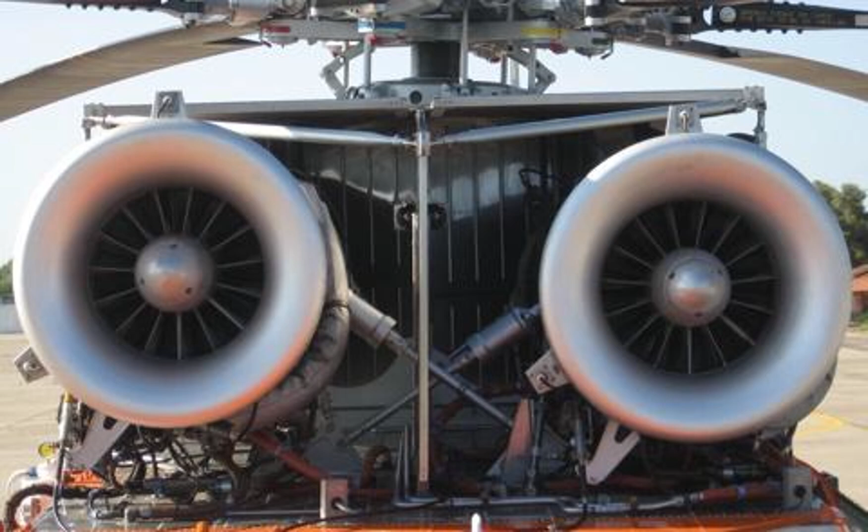Main engines. General description. The S-64 Echo has two main engines rated at 4,500 shaft horsepower mounted on top of the fuselage forward of the main transmission.

The engines are Pratt & Whitney model JFTD 12 Alpha 4 Alpha, which translates as JFTD Jet Free Turbine Drive, 12 Alpha compressor type gas generator straight through design, 4 Alpha major modifications to complete the engine.

Engine symbols and stations. Engine symbols. N1: gas producer, compressor and N1 turbine. Speed given in percent. At 100%, the N1 RPM is 16,030 RPM. N2: free turbine speed given in percent. At 100%, the free turbine speed is 9,000 RPM.

Papa is for pressure. Tango is for temperature. A number following Papa or Tango indicates the engine section, i.e. T5 is the temperature at engine station number 5. Engine stations.

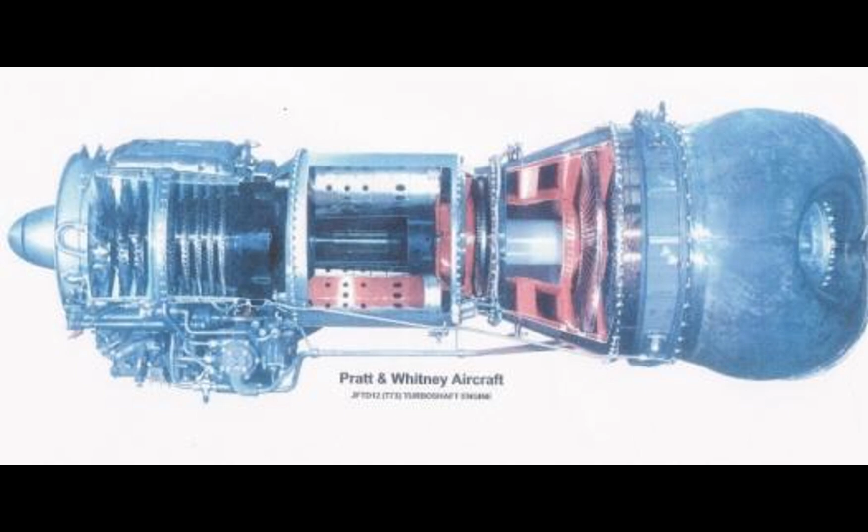Station number 1, air inlet at bell mouth. Station number 2, inlet guide vanes. Station number 3, compressor discharge diffuser. Station number 4, gas turbine inlet. Station number 5, free N2 turbine inlet. Station number 6, free N2 turbine discharge. Station number 7, exhaust outlet.

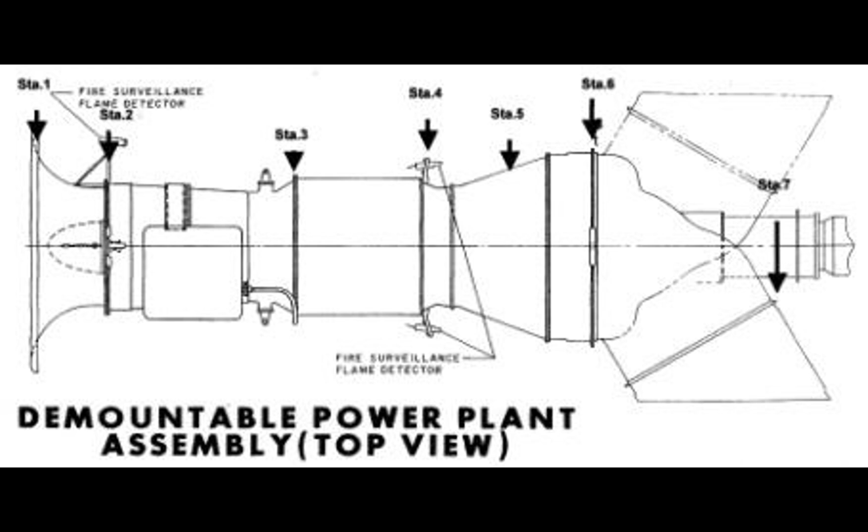Engine sections. Inlet section, engine bell mouth. The bell mouth shaped air inlet is bolted to the compressor inlet case. The bell mouth shape is designed to maximize ram recovery at low speeds.

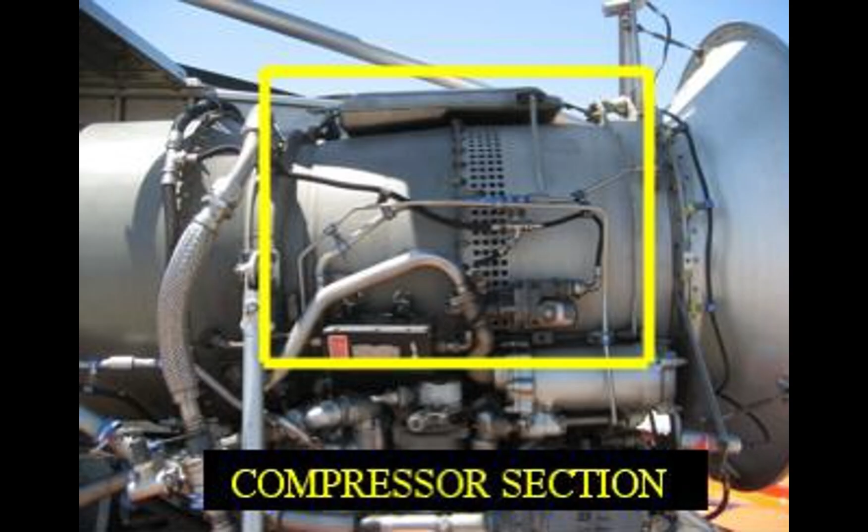Compressor section. Compresses air for engine operation, also provides a mounting for the number 1 main bearing, roller type. The compressor is an axial flow compressor consisting of 9 rotors and 8 stators. The compressor delivers air to the combustion section at a 6.5 to 1 ratio.

Immediately downstream of the 4th rotor stage, compressor air is bled off by an automatically actuated bleed band to facilitate engine starting and increase engine stall margin at low N1 operation. The gas generator turbine drives the compressor.

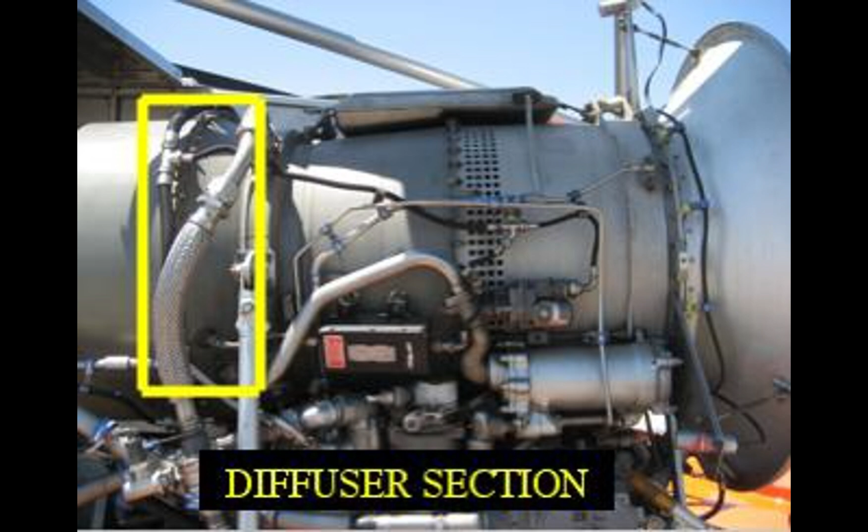Diffuser section directs airflow through the engine. Also provides mounting for the number 2 bearing, ball type, and the forward engine mounts. The diffuser section located between the compressor and the combustion chamber reduces the velocity and increases the pressure of air into the combustion section. High pressure air is bled from this section for internal and external air bleed systems.

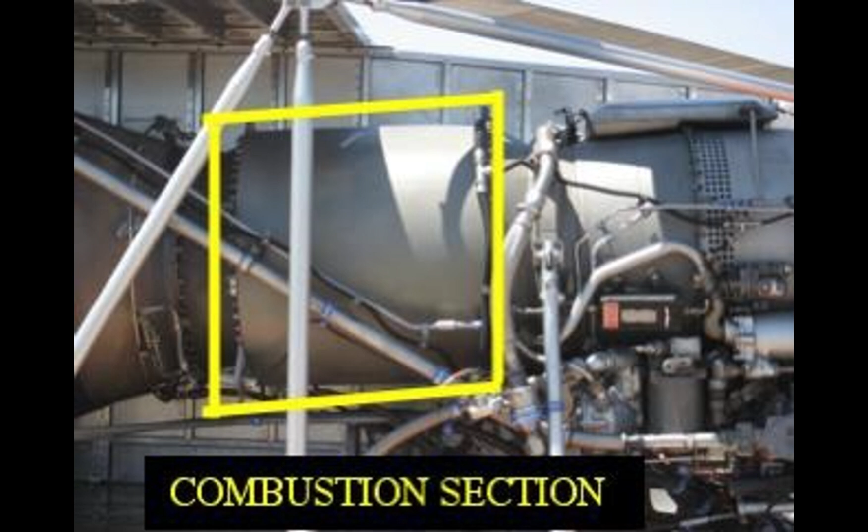Combustion section mixes air and fuel for combustion and directs exhaust gases toward the turbine section. Also provides mounting for the number 3 main bearing, roller type. The combustion section is a can-annular burner type, which houses 8 burner cans in an outer case. Fuel is delivered to each burner through a dual orifice nozzle.

Burners 3 and 6 are equipped with spark igniters to start combustion. All burners are interconnected with crossover tubes to permit flame propagation during start cycle. At the aft of the combustion section and secured to the combustion chamber inner case is the combustion chamber outlet duct. The outlet duct slightly reduces velocity and straightens the airflow exiting the combustion chambers to reduce drag.

A fuel drain incorporated at the bottom of the combustion chamber case automatically drains the combustion section after engine shutdown. The fuel is drained into a holding tank at the lower right of the rear of the cockpit section.

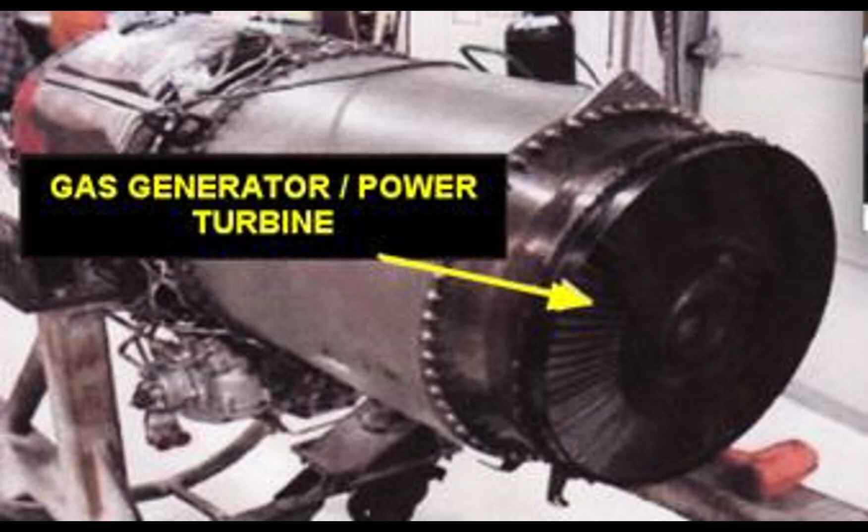Turbine section. Gas generator or power turbine, a 2-stage turbine wheel connected by drive shaft to the compressor and to the component drive gearbox. The turbine discs are attached to the turbine shaft hub with bolts and are separated from each other by the turbine rotor inner seal.

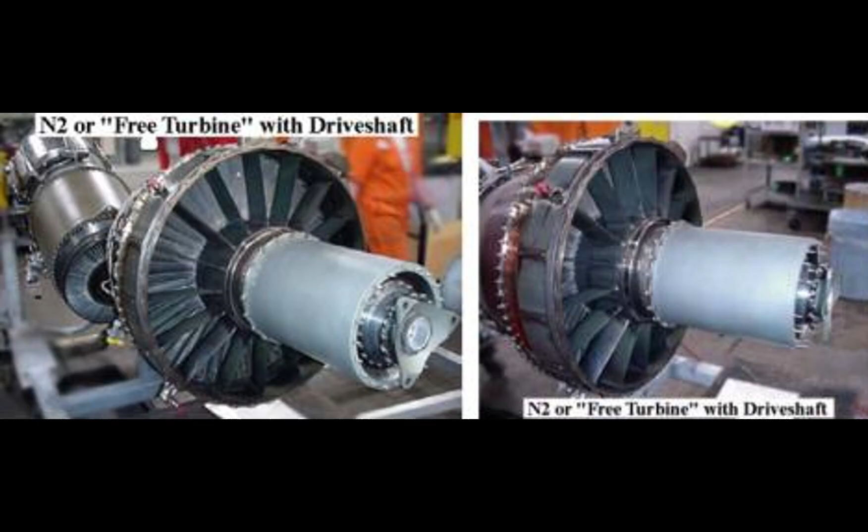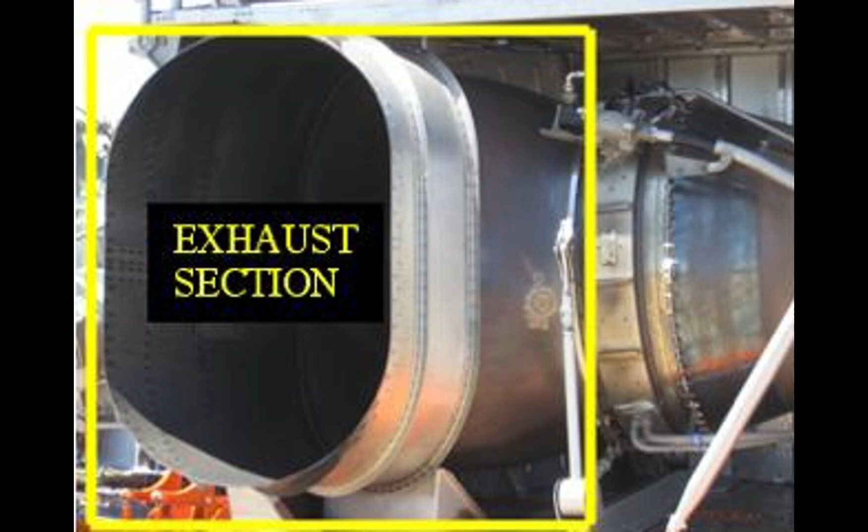N2 turbine or free turbine, a 2-stage turbine wheel connected by drive shaft to the input quills of the main transmission. It also provides a mounting for the number 4 and number 5 main bearings. The exhaust section contains the N2 accessory drive shaft to the N2 accessory gearbox. The gearbox drives the N2 flex shaft cable and the N2 tach generator. Exhaust section ducts the exhaust away from the aircraft.

Component drive gearbox, sometimes called the N1 accessory gearbox, contains the following: the main component drive tower shaft from the N1 shaft, engine starter, N1 tachometer generator, fuel pump, fuel control/governor, engine oil pump on number 1 engine, second stage hydraulic pump on number 2 engine, not used.

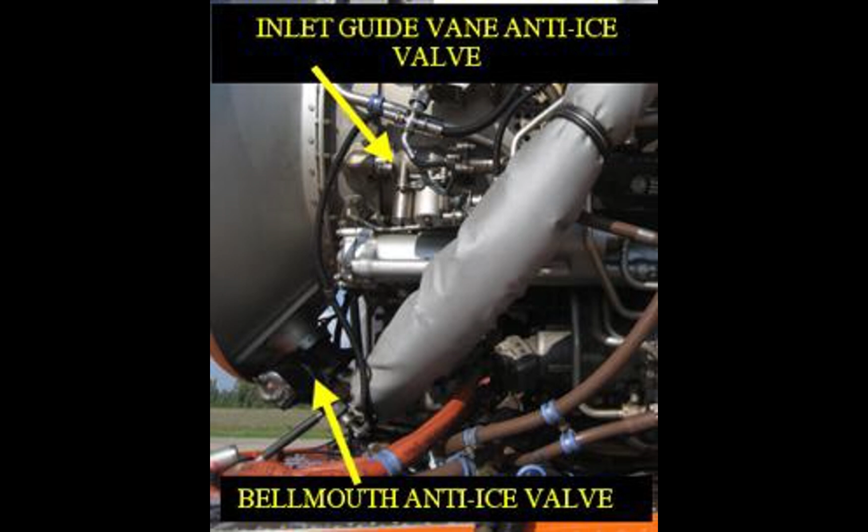Engine systems. Engine air bleed systems. The engine has 3 separate air bleed systems. External air bleed provides air from the 9th stage of the compressor for bell mouth and inlet guide vane anti-ice, fuel heater, and cabin heat. Internal air bleed from the 9th stage is used to cool the hot section, contain the flame in the burner cans, and pressurize the main bearing carbon seals.

Interstage air bleed via the bleed band counteracts compressor instability, thus preventing compressor stall and surges. It is taken from the 4th stage of the compressor and consists of a bleed strap and linkages. It is operated by the fuel control.

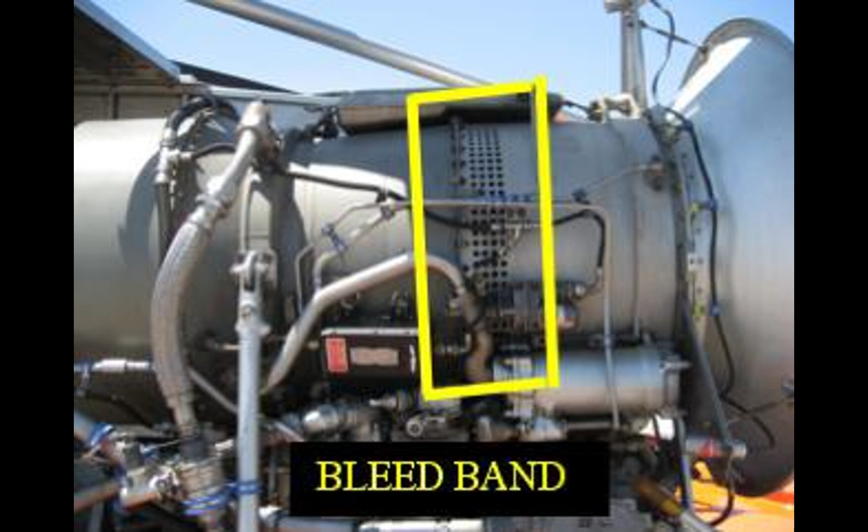Starter system overview. The engine starter motor is located on the lower left of the engine and attached to the accessory drive gearbox. The motor is driven by a 3,500 plus or minus 50 psi hydraulic pressure from the hoist pump. The system is protected by a relief valve set at 3,750 psi and the flow regulator at 15 gallons per

minute. The start cycle. In a typical start cycle, hydraulic fluid moves from the hoist pump through the flow regulator, through the engine start valve, past the pressure switch, through the starter, and then back to the hoist reservoir. The makeup pump supplies hydraulic fluid to the hoist pump to ensure adequate fluid availability to prevent pump cavitation.

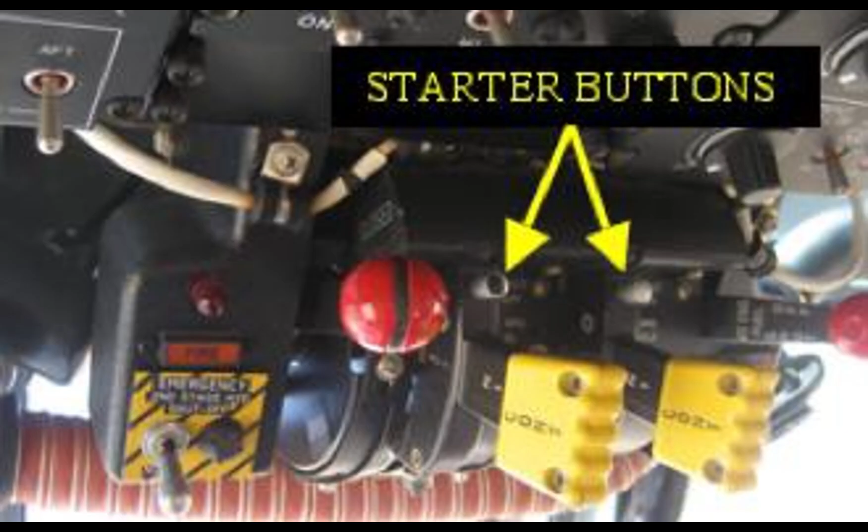Starter circuit. Two starter switches, one for each engine, are located above the N1 levers on the control quadrant in the cockpit. The start circuit is energized by holding an N1 lever in shutoff and depressing the start switch. The start switch energizes the start valve and the starter control relay through the dropout pressure switch.

The start valve allows fluid to flow through the starter. The starter control relay allows the pilot to release the start switch after depressing it for 3 seconds. The start circuit will remain energized until the dropout pressure switch automatically deactivates it, or until the pilot aborts the start. The dropout pressure switch automatically deactivates the starter circuit when the hydraulic pressure in the engine start line drops below 2,000 psi at engine N1 speed of 26 plus or minus 4%.

The abort switch can be activated at any time during the start sequence by pulling out on the N1 lever and moving the N1 lever to shutoff. If the abort switch fails to stop the start sequence, the start may still be aborted by pulling the starter interlock circuit breaker. An advisory light on the caution panel illuminates to advise the pilots when the starter circuit is energized. The starter circuit is 28-volt DC from the number 1 DC primary bus.

The advisory light marked number 1 or number 2 engine start on will go out when the dropout switch deactivates the starter circuit.

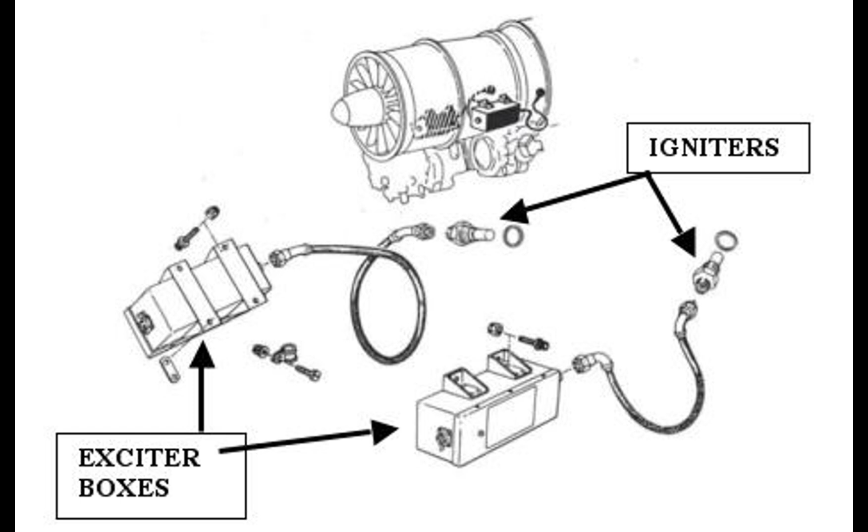Ignition system. There are 2 identical ignition systems on each engine consisting of a high-energy exciter unit, connection leads, and a spark igniter inside the number 3 and number 6 combustion cans. The 2 systems operate independently of each other. The system provides high voltage with 1 to 3 sparks per second from each igniter.

The igniters can be heard in the headset when they are firing. Power is from the 28-volt DC primary bus through the 2 switches marked ignition switch number 1 and number 2 on the master switch panel on the center console.

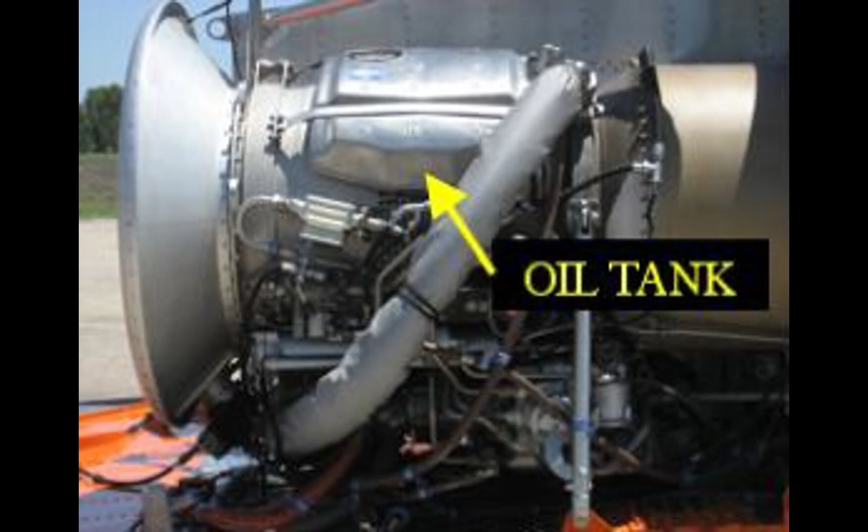Engine oil system overview. Each engine has its own independent oil system consisting of an oil tank, oil pressure system, a scavenge system, a fuel coolant oil cooler, and a breather system. The system is completely automatic, requiring no action by the pilot except monitoring of gauges and caution lights.

Oil gravity feeds from the tank reservoir to the pressure pump. Oil is then forced under pressure through the oil filter and check valve. If the oil filter and check valve become clogged, the oil filter bypass opens. From the filter, oil flows through the fuel coolant oil cooler unless the oil temperature is low. If the temperature is low, a bypass routes oil around the oil cooler.

The oil then flows to the engine main bearings and the N2 speed sense cable and tower shaft. The oil is sprayed on bearings through jets. The oil then gravity feeds to the scavenge pumps, which force the oil up to the oil reservoir. A breather system allows for normal system function with altitude changes.

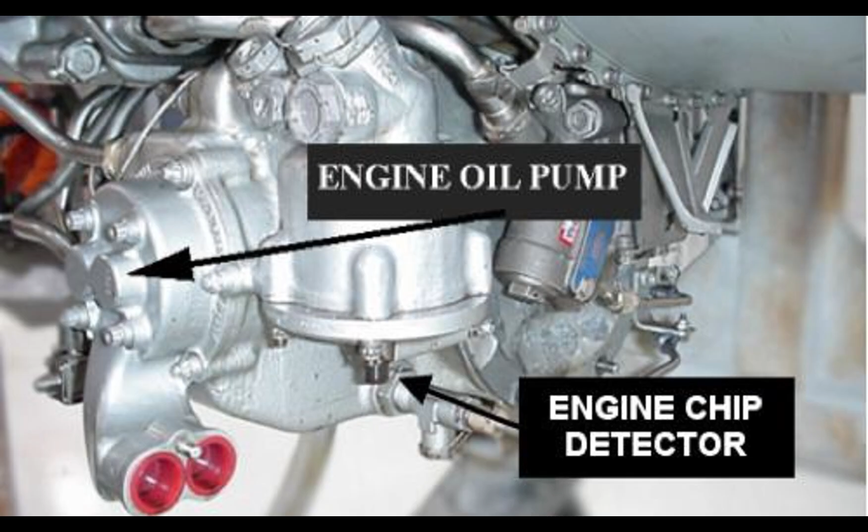Oil pressure system. The main oil pump is gravity fed and is a single element gear type pump. Normal pressure is 45 to 55 psi at 100% N2. The pump is located on an accessory drive gearbox on the left rear side. The main oil filter is mounted on the pump and is removed and cleaned every 150 hours of engine operation.

The filter incorporates a bypass if the filter becomes clogged. A magnetic chip detector is located in the filter cover plate. Metal contamination provides a ground path for the number 1 and number 2 engine chip light on the master caution panel.

A pressure relief valve is used to regulate oil pressure. This relief valve is adjustable and is used to set the correct pressure on the system. A temperature and pressure sensitive bypass valve regulates oil flow through or around the oil cooler. Oil jets spray the pressurized oil on 13 bearing packs located throughout the engine.

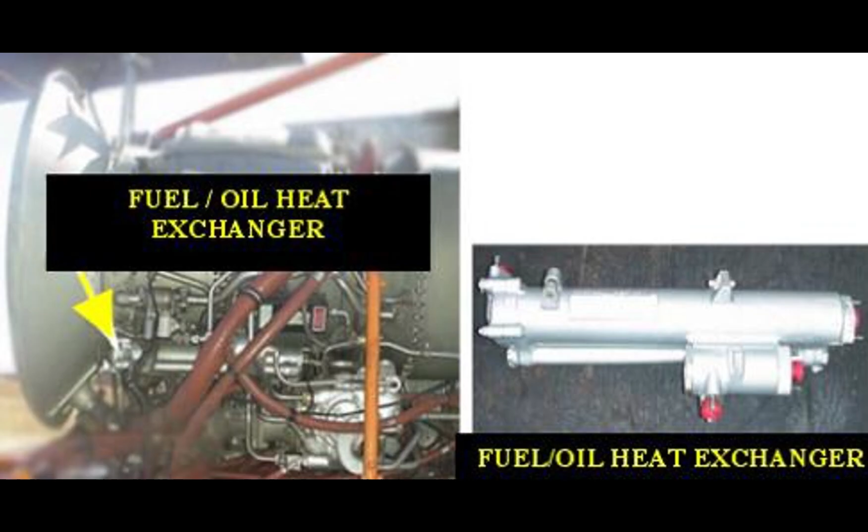Fuel/oil heat exchanger, located on the left side of the engine. The engine is cooled by means of a heat exchanger. As engine fuel proceeds from fuel control to engine fuel manifold, it passes through the oil cooler. The relatively cold fuel absorbs heat from the hotter engine oil.

The fuel oil heat exchanger works with an associated bypass valve. Oil viscosity causes a higher pressure in the cooler, causing the bypass to open. At high temperatures, the viscosity is less, and therefore the pressure in the cooler lowers, causing the bypass to close.

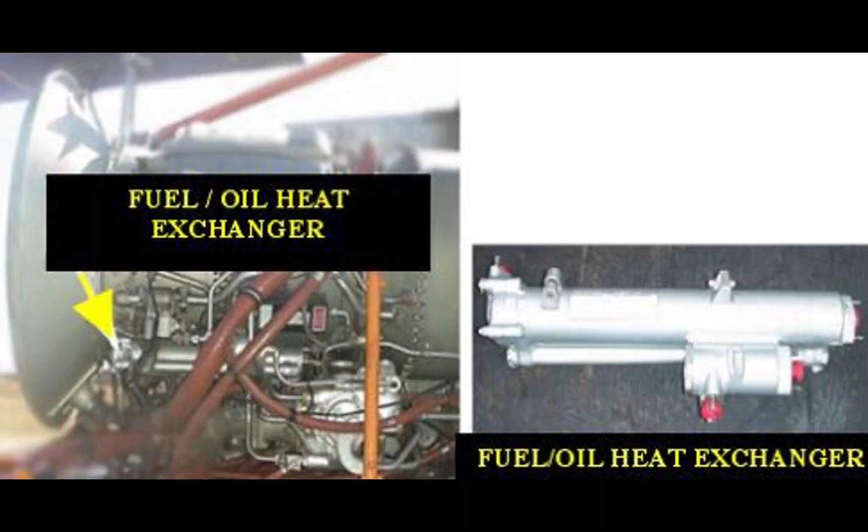Engine oil pressure transmitter. Located on the engine deck below the engine, it converts oil pressure to an electrical signal, which is displayed on the indicator in the cockpit, and is powered by 26-volt AC from the number 1 or number 2 AC bus.

Engine oil pressure switch, located directly above the transmitter, illuminates the number 1 or number 2 engine oil pressure caution lights when pressure drops below 39 plus or minus 1 psi. Engine oil temperature bulb, located in the exit line of the fuel oil heat exchanger. It transmits oil temperature by 28-volt DC to the indicator in the cockpit. There is no associated caution light panel segment light.

Scavenge pumps. There are 5 scavenge pumps, which scavenge the return oil from the bearings and accessory drive gearbox. The pumps return this oil to the saddle tank reservoir. Breather system. The breather system incorporates a breather valve, which is fully open at sea level and gradually closes as altitude increases. This helps to maintain oil system pressures and flows similar to those at sea level. The breather valve also has an air-oil separator, which helps remove air from oil.

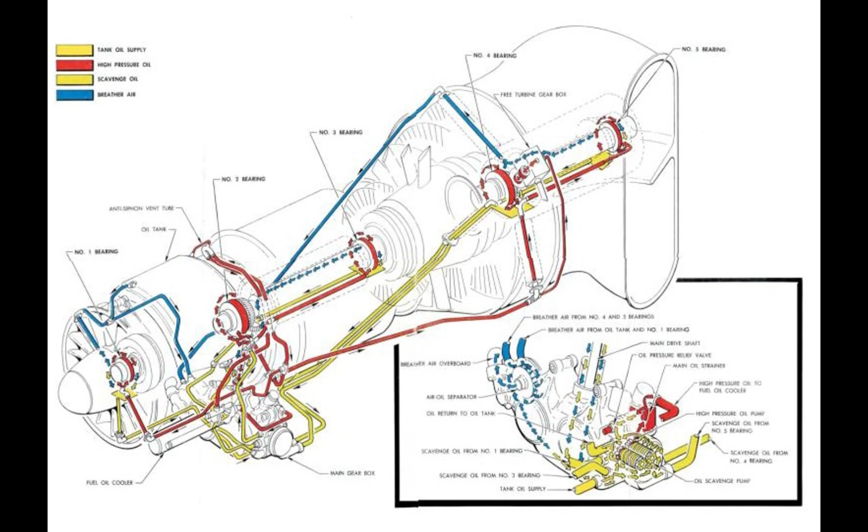Engine fuel system. Overview. Engine fuel proceeds from the main fuel system to the engine-driven fuel pump boost stage, then through the fuel heater to the engine fuel filter and back to the engine-driven fuel pump main stage. It then proceeds through the fuel control where it is metered, through the fuel flow indicator, through the fuel/oil cooler, then to the engine fuel manifold and nozzles.

Fuel heater. The fuel heater runs off air bled from the ninth stage of the compressor and is electrically actuated by a 28-volt DC valve on the air bleed line. The valve is controlled by the heater switch on the fuel management panel on the center console in the cockpit. The fuel heater is used only for suspected fuel icing.

Operation: if the fuel temp low advisory light illuminates prior to takeoff, the fuel heater is to be used as a precaution. If the fuel temp low advisory light is on and the number 1 and number 2 fuel bypass caution lights illuminate, fuel icing is suspected. In either case, the heater switch should be placed to heater for 1 minute in every 30 minutes. Note: 1 full minute of operation is recommended to return the fuel filter to its maximum filtration capacity.

When using the heater, monitor the engine oil temperature for an increase. Do not use the heater during takeoff or landing. If the engine fuel filter light does not go out after about 1 minute of heater operation, the filter is clogged with foreign matter instead of ice.

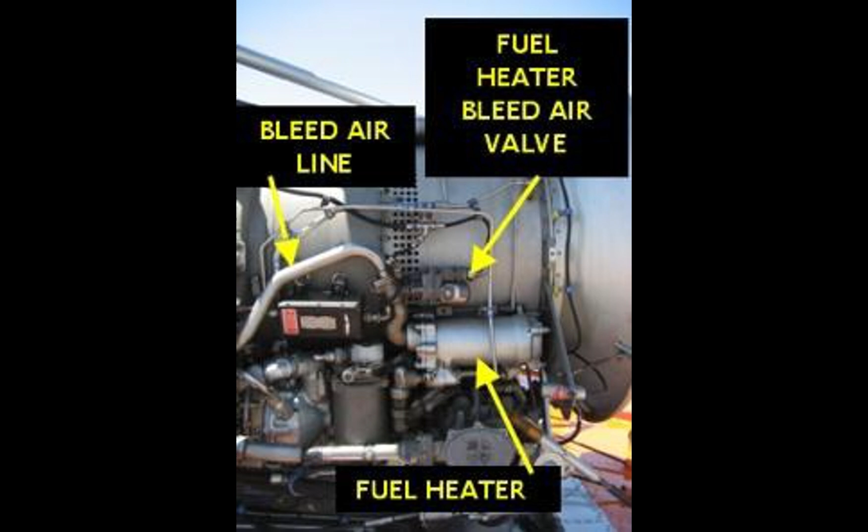Fuel temp low light. The sensor is located in the hoist well, making it more a part of the airframe fuel system than the engine, but it directly affects the decision to use the fuel heater. Whenever the fuel in the fuel lines leaving the main fuel tanks reaches a temperature below 1.1 plus or minus 1.1 degrees Celsius, that is 34 plus or minus 2 degrees Fahrenheit, the light illuminates. The light operates on 28-volt DC from the primary bus. Operation of the fuel heater will not cause the fuel low temp light to go out.

Engine fuel filter. This is a cartridge type filter which incorporates a bypass in case the filter becomes clogged. During bypass, a differential pressure switch located on top of the filter will close at a pressure differential of 4 to 5 psi, turning on the corresponding engine fuel bypass light on the master caution panel.

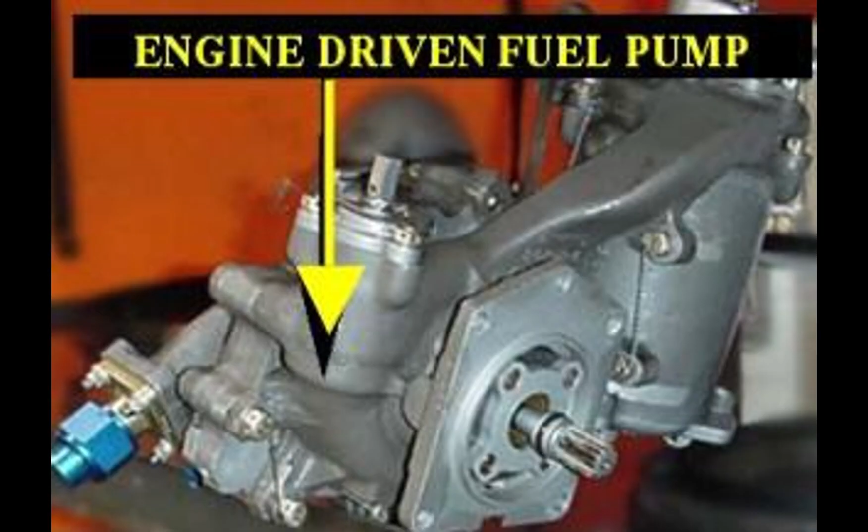Engine driven fuel pump. This is a centrifugal pump which receives fuel from the main fuel system. The first, or boost stage, operates at approximately 20 psi over inlet pressure. The second, or main stage, is a gear-type pump which pressurizes the fuel to 150 to 800 psi, depending on demand, for injection into the engine. The pump is attached to and behind the fuel filter. The fuel control is mounted to the engine-driven fuel pump.

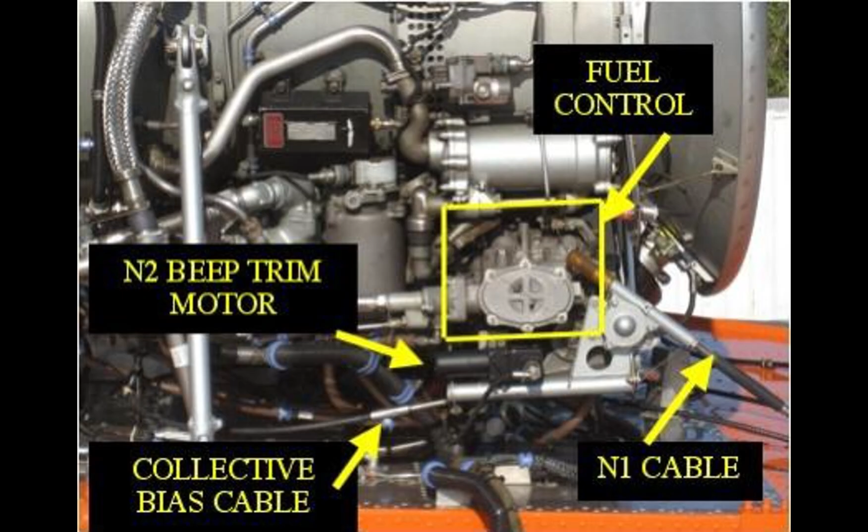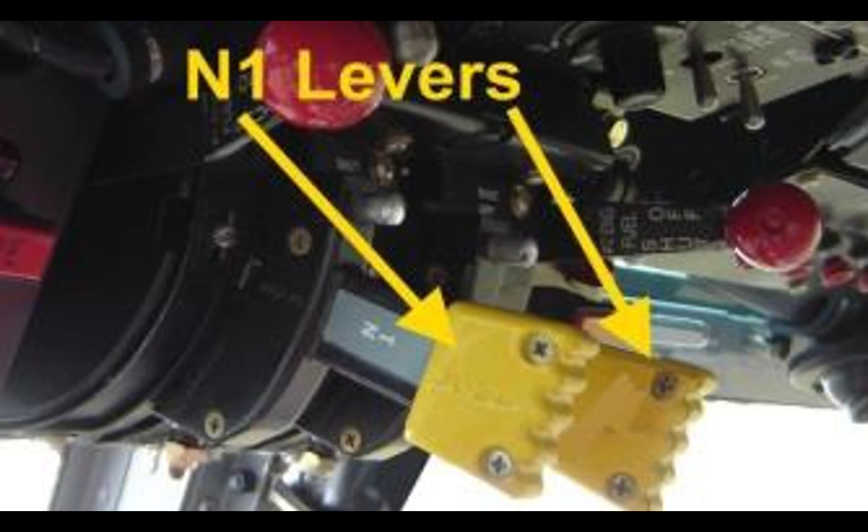Fuel control. Made by Hamilton Standard, the hydromechanical fuel control with free turbine speed sensing unit governs the free turbine rotor speed. It schedules fuel flow to provide the power required to maintain an approximately constant free turbine speed N2 under all loads. The fuel control also schedules the opening and closing of the bleed band to facilitate engine start and low N1 operations. Pilot inputs to fuel control. The N1 lever position determines shut off, ground idle, or speed governing at full forward.

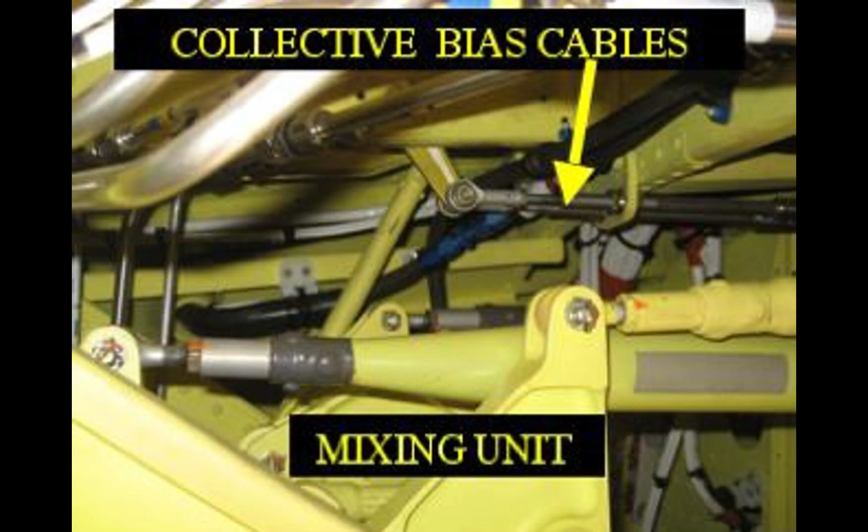The N2 speed trim, beep trim, mounted on the collective lever, sets the desired N2 RPM for each engine. The collective bias system provides approximate rotor load signal to fuel control each time the collective is moved. This helps the fuel control anticipate power requirements to prevent rotor system overspeeds and underspeeds. The bias cables are attached to the mixing unit in the attic.

Engine inputs to fuel control. The N2 governor provides the main input for governing of rotor speed and fuel flow schedules. The flex shaft cable provides signals to the governor when N2 speeds increase or decrease from the desired speed. It also provides overspeed protection by shutting down the engine if 115% N2 speed is attained.

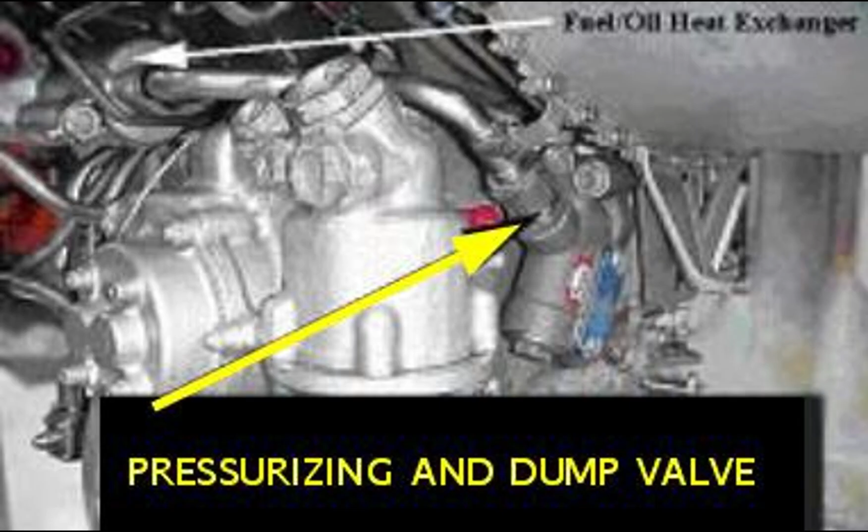Fuel control outputs. Schedules fuel flow to the fuel nozzles in the combustion section. Controls the interstage bleed band operation. Controls the pressurizing and dump valve. There are two valves. The pressurizing valve provides fuel flow in the manifold into the primary and secondary and ensures the proper atomization of the fuel being discharged into the combustion chamber. The dump valve drains fuel from the manifold and opens anytime the fuel control is not producing pressure.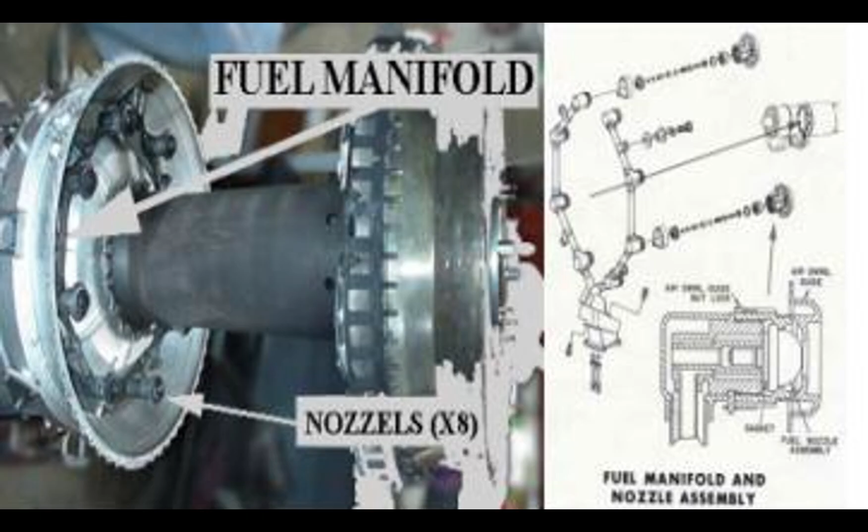Fuel manifold contains 8 dual fuel nozzles located in the front center of each burner can. The nozzles are split-type nozzles with a primary jet on the outside for low engine RPM and a secondary jet on the inside. Both nozzles are used at high power settings above 80% N1.

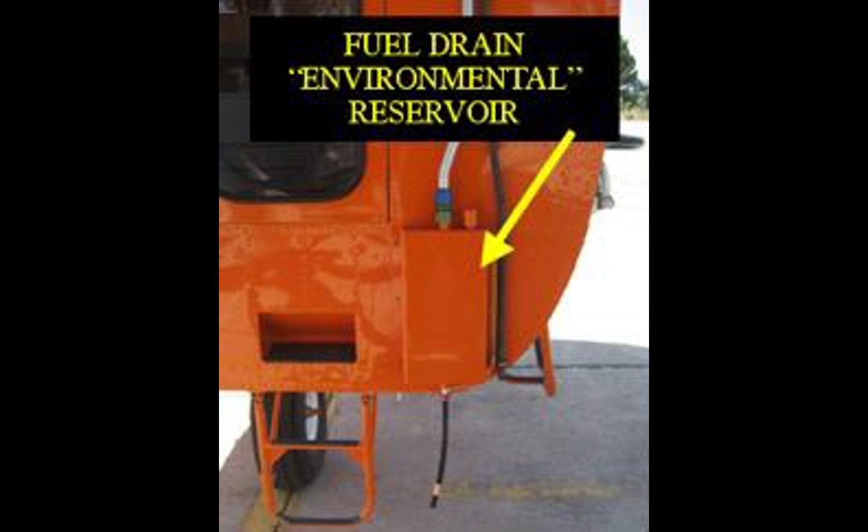Fuel drain. Located at the bottom of the combustion chamber, the drain valve is a reed type which closes when there is pressure inside the combustion chamber and opens when the engine is shut off to drain excess fuel from the chamber. The fuel drains into the fuel drain reservoir located on the back of the cockpit.

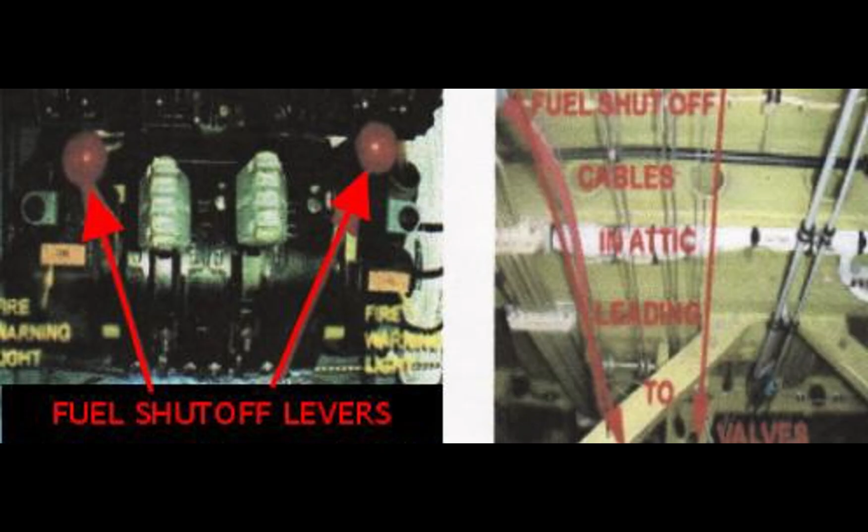Engine controls. Fuel shutoff valves. Each engine has a fuel shutoff valve located in the center of the attic. This is a mechanical shutoff operated by two handles called fuel shutoff levers on the overhead quadrant. The fuel shutoff levers are connected to the shutoff valve by cables and pulleys. When closed, the shutoff valve prevents any fuel flow to the engine. When the levers are full aft, the fuel flow is shut off. When they are full forward, they open the valves.

N1 levers. The N1 levers are located on the overhead quadrant between the fuel shutoff levers. The left one controls the left engine, or number 1 engine, and the right one controls the number 2 engine. They are marked shutoff, ground idle, and full open. The N1 levers provide control of the engine speed, and fuel control is allowed to provide engine power upon demand. Engine power output can be limited by reducing the N1 lever setting to any position between full open and ground idle.

The N1 levers also provide engine start button and switches inside the N1 lever assembly to allow the start sequence to proceed or to abort the start. N1 lever must be held against the stop to engage starter. See starter system. Topping governor RPM control in the power range permits scheduling of N1 speed during start and idle. Stops fuel from entering the fuel manifold when placed in the shutoff position.

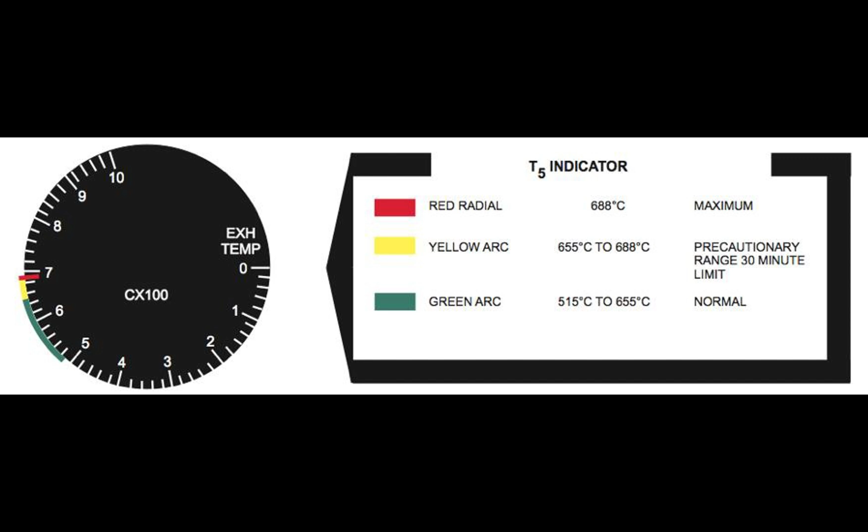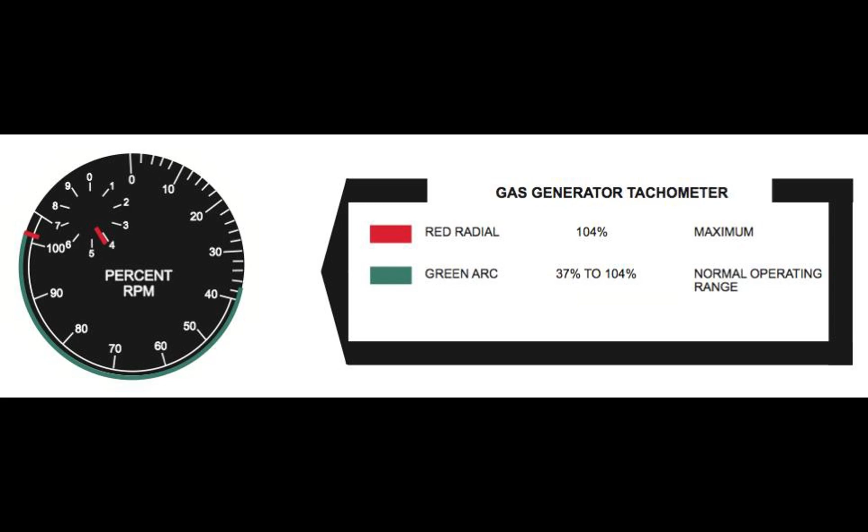N1 gas generator tachometer. The indicator marked %RPM displays N1 speed in percent. The indicator contains two dials and two needles. The larger dial and needle indicates RPM in 2% increments from 0 to 100. The smaller dial and needle indicates RPM in 1% increments from 0 to 10. The system uses a tachometer generator mounted on the accessory drive gearbox on each engine. With the incorporation of low N1 speed warning, the system becomes dependent on 28-volt DC from the number 1 and 2 primary bus.

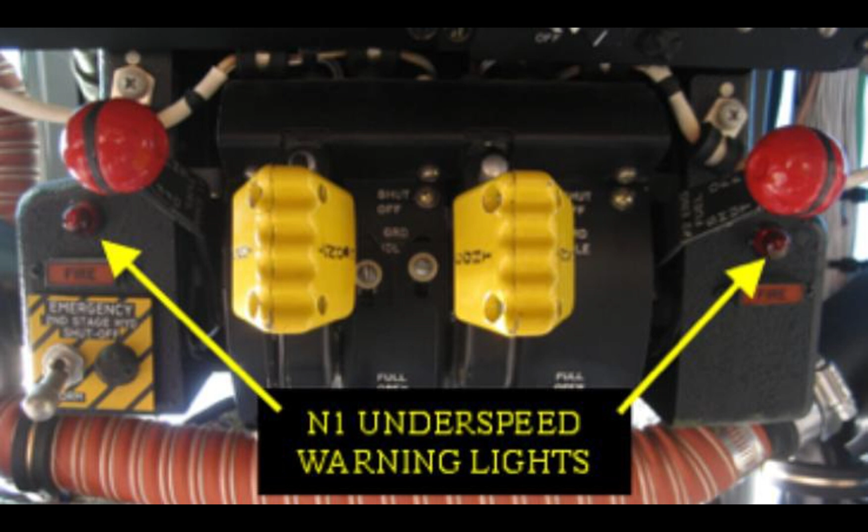The N1 system will have one of two N1 underspeed warning systems installed. N1 underspeed warning system. This is the original system. It consists of the two N1 indicators, each with a built-in 1 kHz tone generator that activates anytime the indicator is below 60% N1 speed. The tone can be silenced by a spring-loaded switch marked N1 Disable Audio on the center console. The system is automatically rearmed anytime the N1 speed of both engines has increased above 60%.

There are also four red N1 warning lights, two for each engine, that activate when the respective engine N1 drops below 60%. They will remain on until the N1 speed climbs above 60%. There is one for each engine on the glare shield and one next to each N1 lever.

N1 Underspeed Enhanced Voice Warning System. This new system incorporates a self-test mode, a chime, and a voice warning. When the aircraft battery is switched on, the system automatically enters the self-test mode. Each engine's N1 system will be tested separately. This function cannot be interrupted or silenced by the pilots. Once the test is complete, the voice warning can be silenced by the aural mute button on the center console. This mute button replaces the spring-loaded audio disable switch.

A 700 Hz chime will activate when either engine N1 drops below 65%. A voice warning, number 1 engine out or number 2 engine out, will activate if either N1 drops below 59%. Both the chime and the voice warnings can be silenced by the mute button. The system will rearm and reactivate if the N1 climbs above 65% and drops below again, or if a new event, such as the opposite engine N1 decreasing below either 65% or 59%, occurs. This system also incorporates the same four red N1 warning lights as the old system.

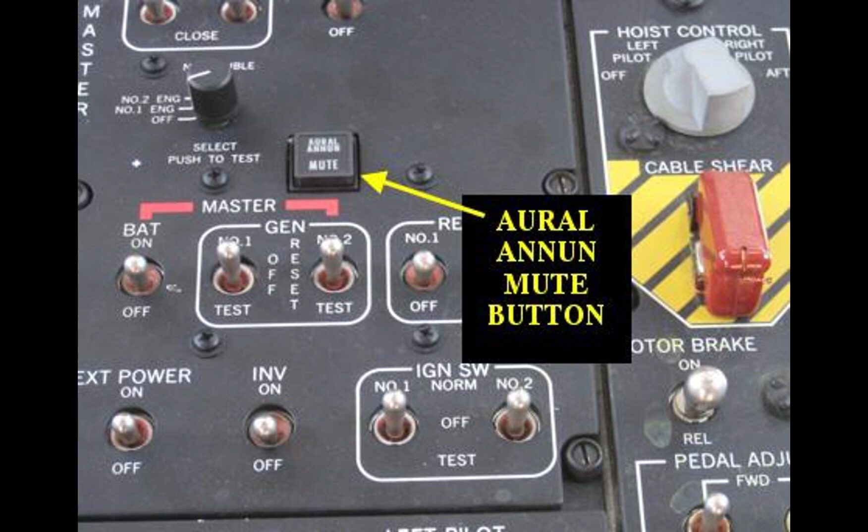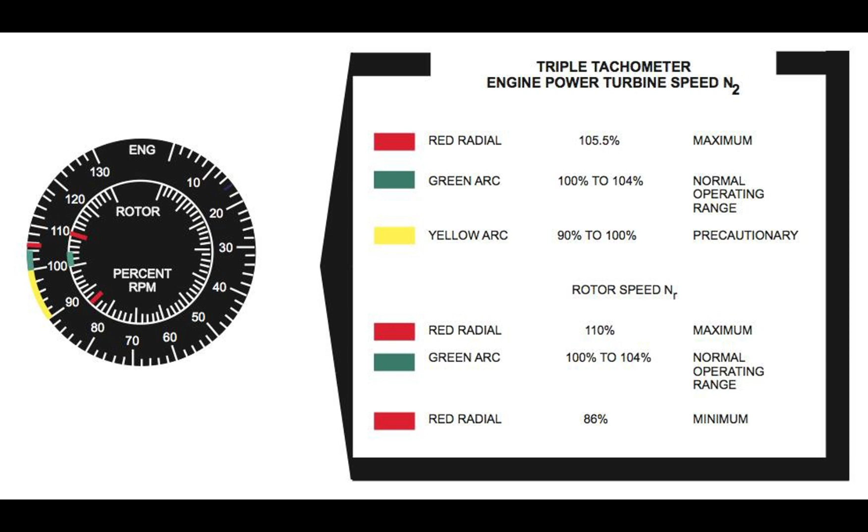The triple tachometer. The triple tachometer has three needles, number 1 and number 2 engines N2 RPM, and one for NR, or main rotor RPM. Each needle has its own tachometer generator and functions independently of the other needles. The engines and rotor speeds are displayed in percent RPM. The gauge has an outer dial labeled engine and an inner dial marked rotor.

Each engine N2 tachometer generator is located on the top half of the engine and is driven by the free turbine accessory drive gearbox. The rotor tachometer is located on the back of the main transmission accessory gearbox, below the generators and the tail rotor drive shaft. The tachometer generators are all self-generating and independent of aircraft electrical system.

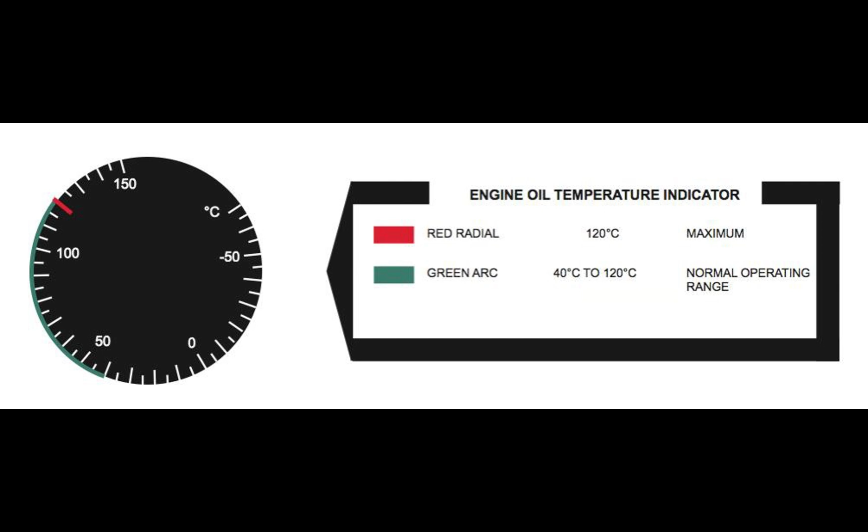Engine oil temperature gauge. The indicator displays engine oil temperature from a sending unit in the exit line of the fuel/oil heat exchanger. The system operates from 28 volts DC. The indicator is calibrated in 5-degree increments. Engine oil pressure gauge indicates engine oil pressure from a pressure sending unit located on the engine deck below the combustion section. The system is powered by 26 volts AC from the auto transformers. The dial is calibrated from 0 to 100 in 5 psi increments.

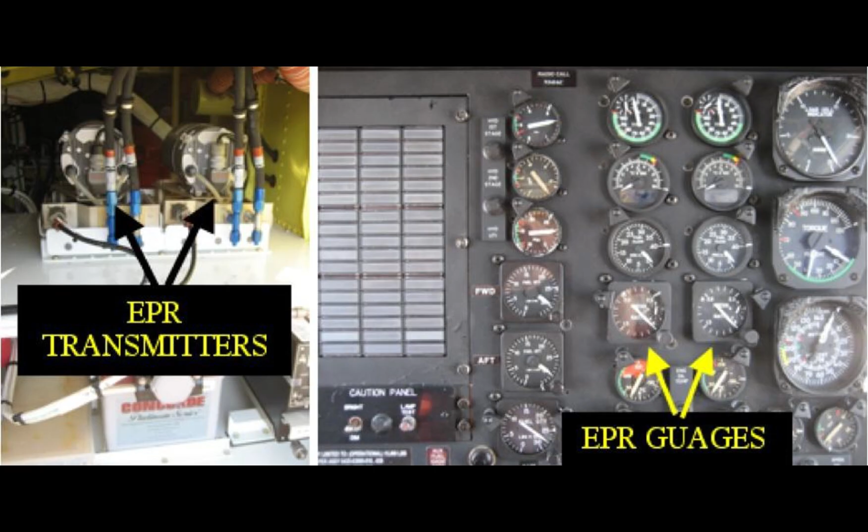Engine pressure ratio, EPR. The EPR indicates the gas generator pressure ratio as a measure of the power being developed by the engine.

This is the ratio of pressure between P2 pressure and the P5 at the N1 turbine discharge. The EPR gauge has two dials, a large outer dial and a needle calibrated from 1 to 2.5 in increments of tenths, and a small dial and needle calibrated from 0 to 10 in increments of 1/100th. The signal for the EPR gauges is generated by the EPR transmitters located in the battery compartment. The gauges are powered by 115 volts AC.

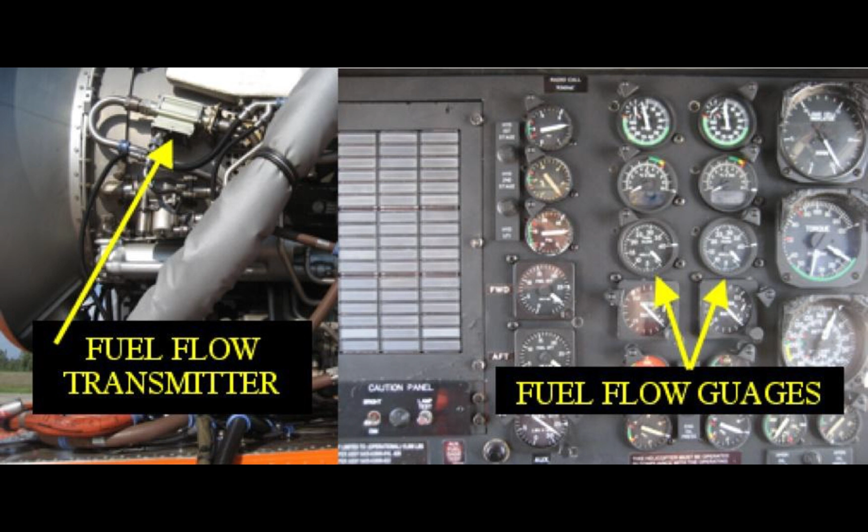Fuel flow indicators indicate fuel burned by the engine in pounds per hour. Each engine has its own indicator calibrated from 0 to 4,000 pounds in increments of 100. The indicators are powered by 115 volts AC.

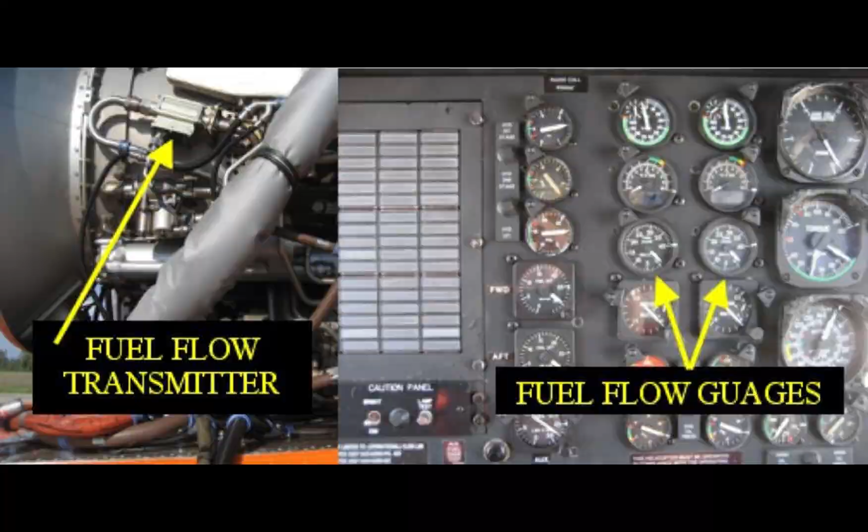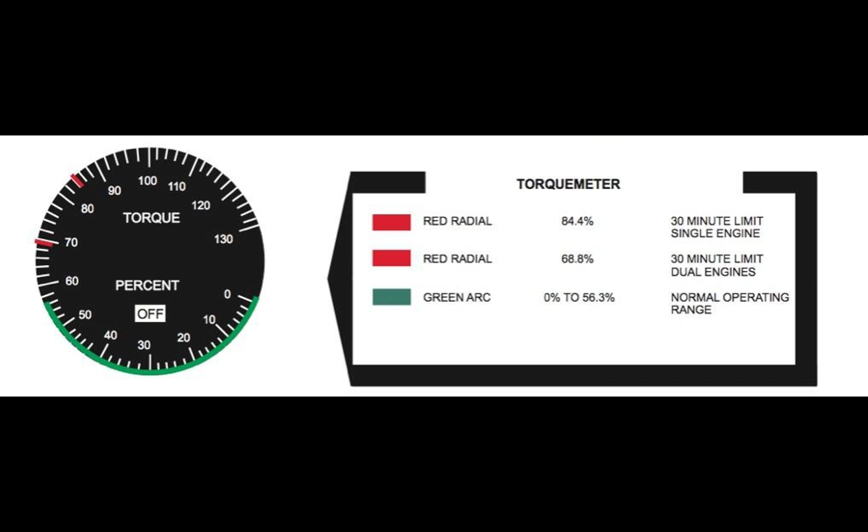Torque meter indicator. There are three identical torque meter indicators, two on the main instrument panel and one on the aft seat pilot's panel. They indicate input torque to the main gearbox as a percent of maximum engine power output for each engine. A torque sensor on the engine rear support sends a signal through the signal conditioners located in the compartment under the right side pilot to the indicators. The system is powered by 28 volts DC.

Engine fire warning indicators. There are two separate fire warning systems installed in the aircraft: the engine fire detection system and the fire surveillance system. There are two red master fire warning lights on the instrument panel next to the master caution capsules. These illuminate anytime a fire is detected by either fire warning system. There are also two fire warning lights on the overhead quadrant next to the fuel shutoff levers. These lights will indicate which engine has the fire. The system operates on 28 volts DC from the primary bus.

The engine fire detector system has four continuous element fire detector cables, two for each engine, mounted adjacent to the engines. These are heat sensing loops which allow more current to flow when heated by a fire. They are wired in a closed series loop and are connected to a control unit which illuminates the fire warning lights in the cockpit in case of a fire. The system is powered by 28 volts DC from the primary bus.

The fire surveillance system has 5 flame detectors for each engine and 1 detector for the auxiliary power plant, APP. The flame detectors are photoconductive cells that react to hydrocarbon and magnesium radiation in a fire. The detectors are connected to 3 control amplifiers in the attic and the same fire warning lights as the fire detection system. An additional fire light for the APP is located on the APP control panel on the overhead console. The APP fire light is also connected to the master fire warning lights. The system operates on 28 volts DC from the primary bus.

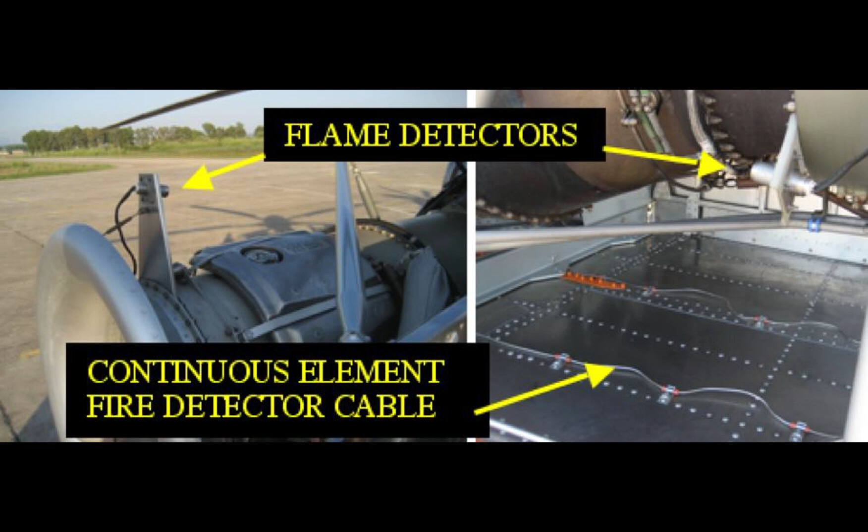Auxiliary power plant. Overview. The aircraft utilizes an auxiliary power plant, APP, to allow ground starting of the main engines and to power the aircraft electrical and some hydraulic systems when the main rotor is not turning. The APP is located aft of the main transmission. It is connected to the accessory gearbox by a clutch and a driveshaft system. Made by Solar, the APP is a turbine engine. It weighs approximately 79 pounds, develops approximately 72 horsepower, and uses 73 pounds per hour of fuel maximum. The engine has automatic start and control circuitry for operating. An advisory light on the caution advisory panel in the cockpit illuminates to indicate the APP is running.

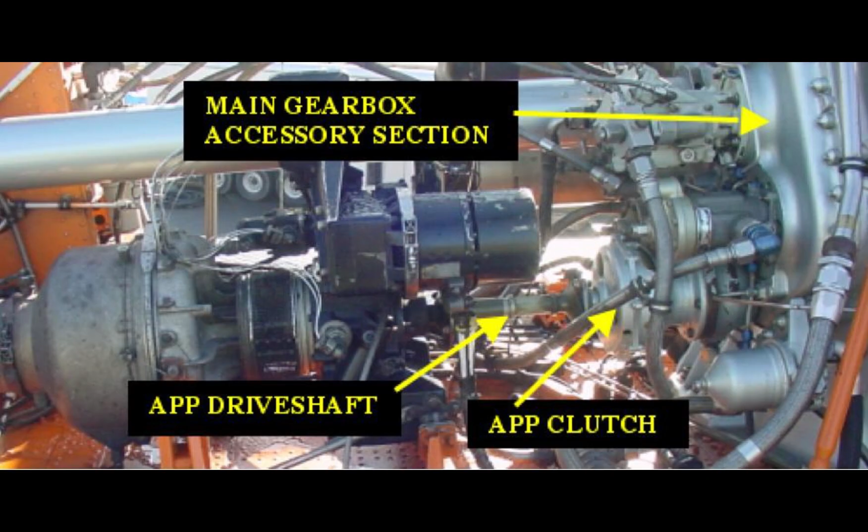Components. Starter motor. A 28 volt DC motor is utilized for starting, normally powered by the aircraft battery. Oil system. 3-quart system capacity. Pressurized system with filter and gear type pump. Oil filler cap and dipstick must be checked for quantity prior to engine operation. APP clutch. A centrifugal clutch is mounted between the APP driveshaft and the main gearbox. It transmits power from the APP to the main gearbox accessory section. The clutch engages automatically at 76% to 90% APP speed. It can be adjusted if engagement is too slow or too fast.

APP control panel. Located on the overhead control panel in the cockpit. It consists of a master switch, start and stop switches, a temperature gauge to monitor EGT, and a tachometer to monitor engine speed. There are 3 warning lights to indicate low oil pressure, 6 plus or minus 1 psi; high exhaust temperature, 1070 to 1090 degrees Fahrenheit; and overspeed, 110%. These warning lights illuminate to indicate which malfunction has caused the automatic control circuitry to shut off the APP.

Master switch is located on the APP control panel. The switch controls operation of the airframe fuel shutoff valve and arms the APP circuit. Start switch arms the holding circuits for the start fuel valve and the ignition exciter, and it energizes the start relay located on the winch well relay panel. Stop switch is pushed closed to abort a start or to turn off the APP. 20% switch controls the start fuel valve. 20% switch is spring loaded and is held in the hold for start position until the APP reaches 20%. The switch is then let go, deactivating the start fuel and igniter.

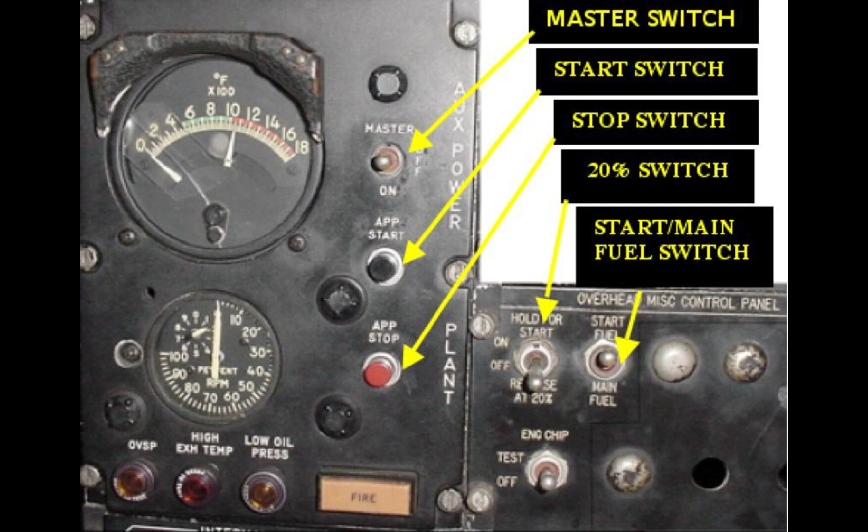Start main fuel switch controls the start fuel valve and main fuel valve. In the start position, the main fuel valve will be closed and the start fuel valve will be open. At 40% RPM on the indicator, the start main fuel switch is manually moved to the main fuel position.